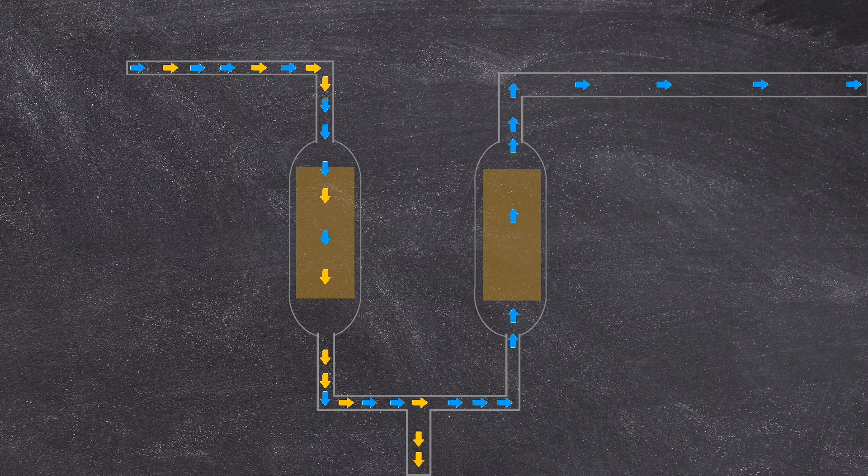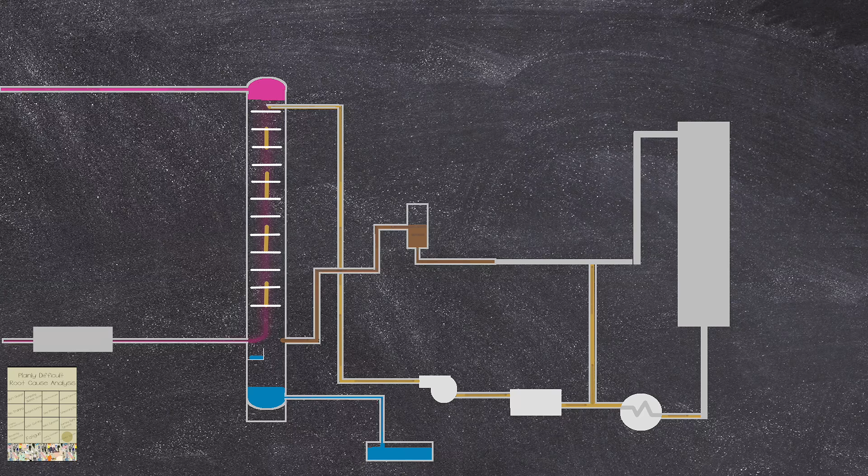From the plant, crude oil and raw LPG is sent to Long Island Point for further processing to commercial LPG and stabilised oil for refinement. The natural gas once processed at Longford, however, is then dispensed to the Victorian Natural Gas Network. The natural gas works are done by 3 gas plants, named rather creatively GP1, 2 and 3. Now, the process roughly goes as follows.

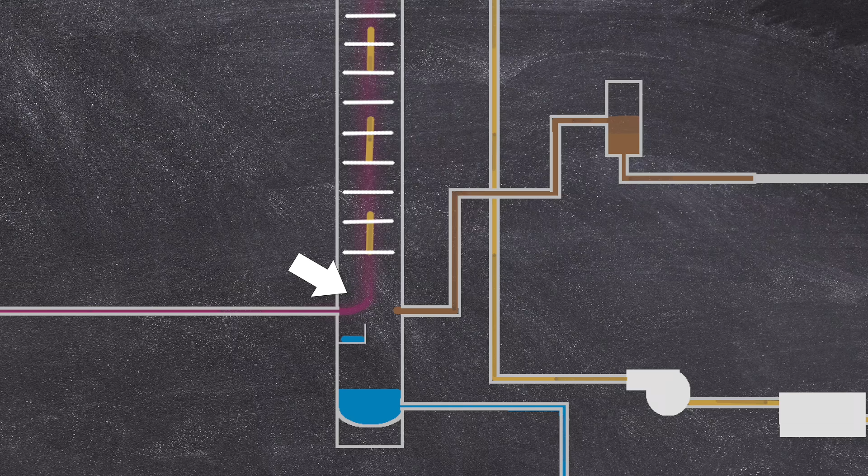Gas comes in from the offshore fields via pipelines. It is cooled and loses its pressure during its journey along the lines to the onshore. The materials pumped from the fields contain methane, ethane, propane and butane, as well as water. During this time, water and the hydrocarbons become condensed and settle in the low parts of the pipework. These are known as slugs and can prove to be a little bit troublesome, as they can weigh several tons.

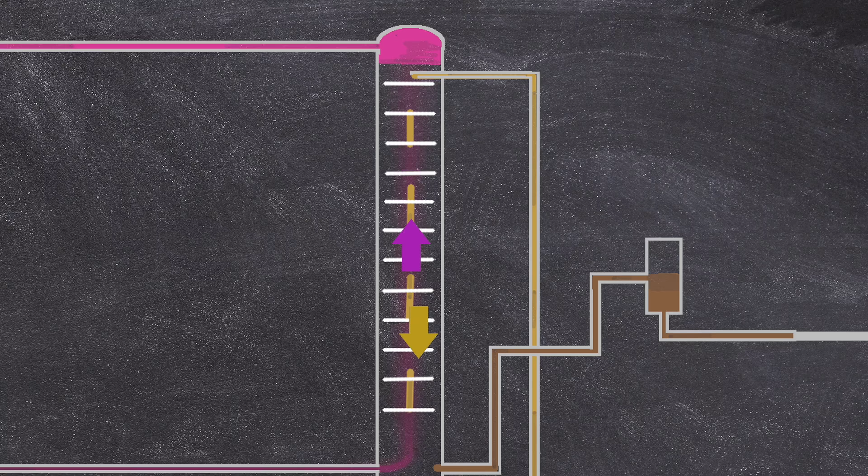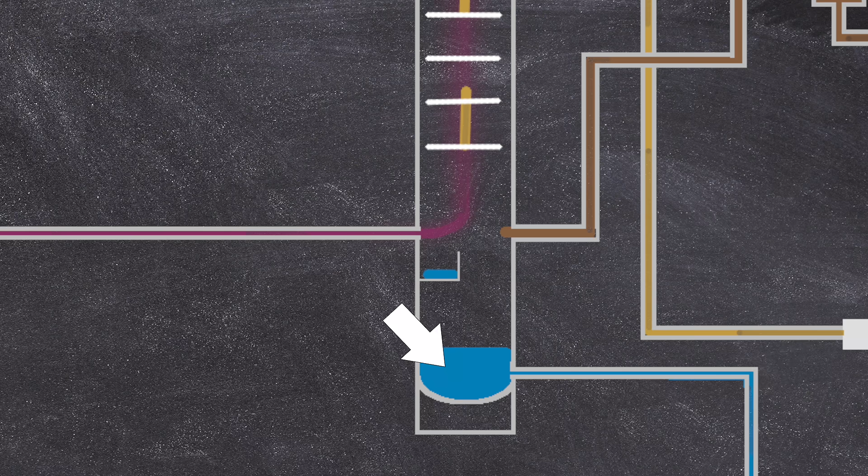When they reach the plant, the energy they carry is dissipated via things called slug catchers. These separate off liquid from the gases for further processing. This is done at the 3 gas plants. It passes through an inlet separator in each plant, which removes any free water and any other condensate. The gas then passes through molecular sieves in each plant to remove water vapour and hydrogen sulfide.

Now, for the rest of this video, I will be focusing on just one of the gas plants, which is the first one built in 1969, named number 1. Anyways, the gas inlet is chilled by 2 heat exchangers to prepare it for the absorption process, which is better performed at colder temperatures. Gas plant 1 has 2 absorbers which operated in parallel. The gas was fed into the lower part of the absorbers at a temperature of -25 degrees Celsius.

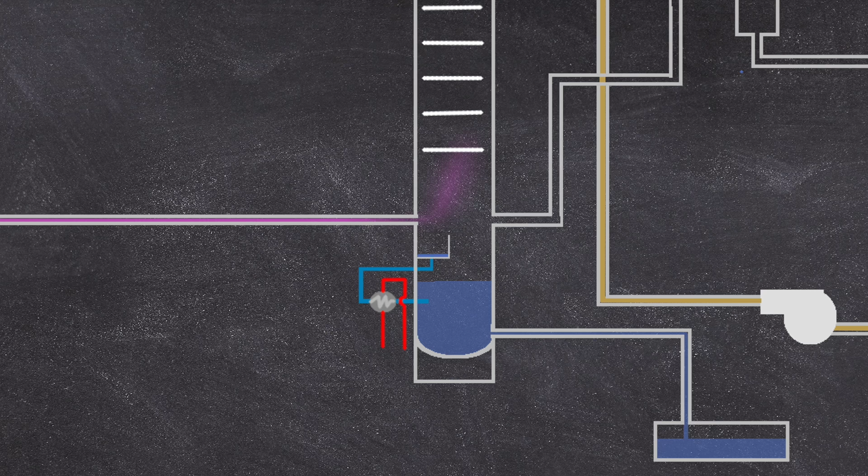Each tower had internal trays all the way up it. This allows gas to rise and for oil to be fed at the top to drip down via the help of gravity from each tray downwards. As the oil dropped from tray to tray, it absorbed a lot of the heavier components shed from the gas, for example, the ethane, propane and butane that it contained. The lean oil was thus made rich, as it was saturated with the hydrocarbons.

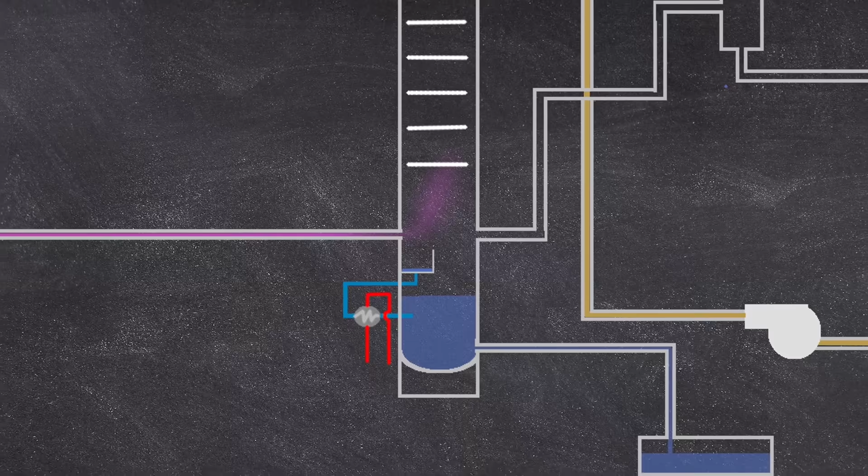Condensate carried in the cooled gas dropped into a lower tray in the absorber, and this was taken off for further processing. In order to help remove it, it was warmed up using a heat exchanger and goes via its own flash tank.

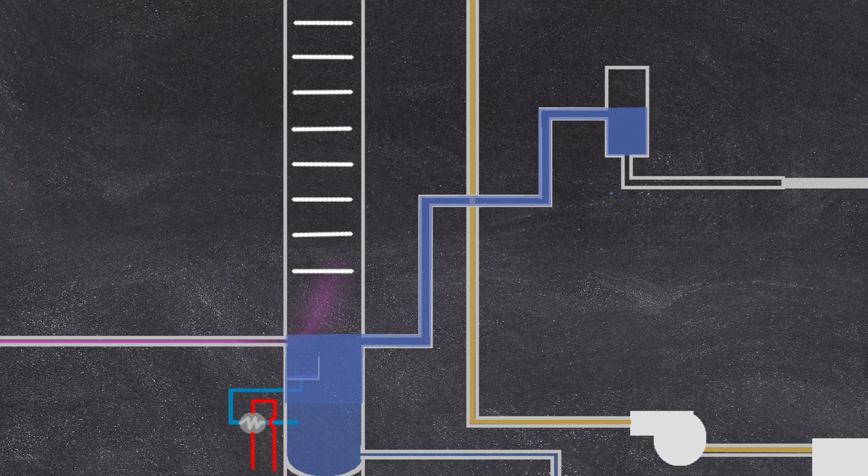The gas taken out of the top of the absorber is then taken off for sale as natural gas for consumers. Operators for Gas Plant 1 were informed of the system's status via equipment in the control room. Due to its age, dating back to 1969, the instrumentation was a mixture of pneumatic equipment installed at the plant's vintage and a much newer computerized system.

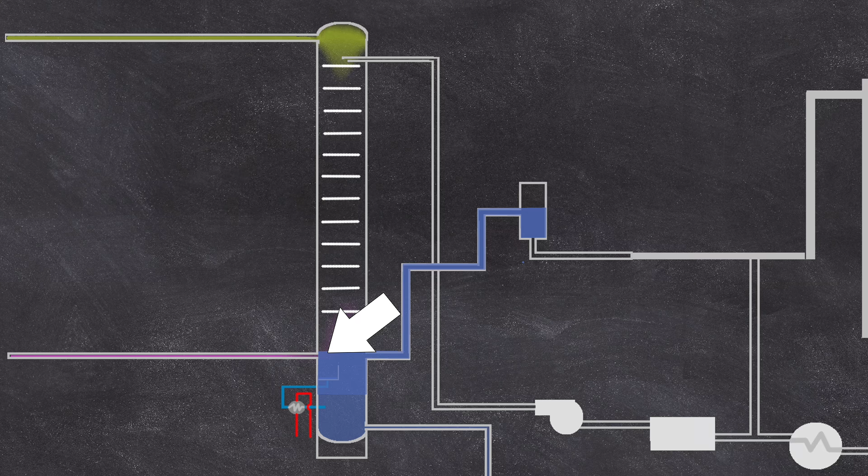Now the site ran 24 hours a day and was staffed as such, with two 12-hour shifts formed by five shift teams. Right, so now we've got some kind of idea of how the plant worked and a rough overview of its operations, let's move on to the main course of our video, the disaster.

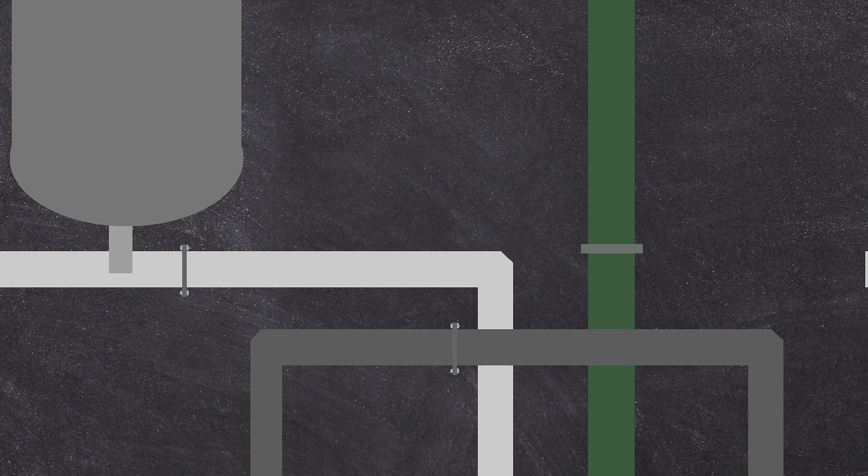The disaster. It is the morning of the 25th of September 1998, and Gas Plant 1 was dealing with a large buildup of condensate in absorber B. The condensate could only go to two places: the condensate flash tank, or overflow into the rich oil line to its own flash tank, the latter of which being less than ideal. Eventually, the condensate level rose to such a point that it was unmeasurable by the plant instrumentation. This was a sure sign that it had risen into the rich oil section of the absorber.

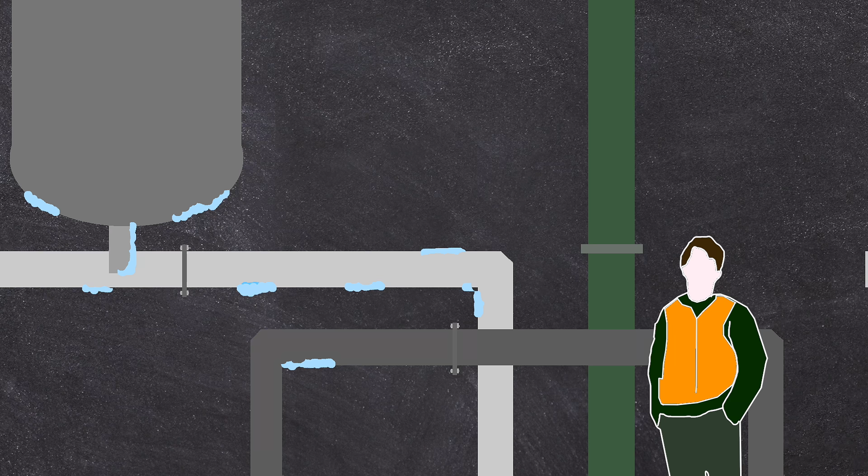The decrease in temperature and rise in condensate level caused the valve to close, regulating the flow of two vital pumps, which played a part in circulating the lean, warm oil to the absorber. This caused them to shut down, thus cutting off the flow of warm oil to the absorber, but gas was still being inserted into the system, which was still bringing in more condensate. The increase in cool condensate and lack of warm oil caused the system temperature to drop.

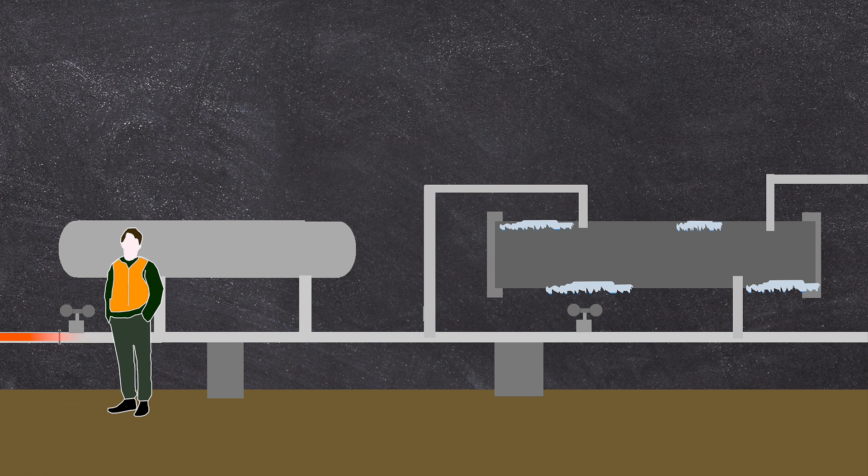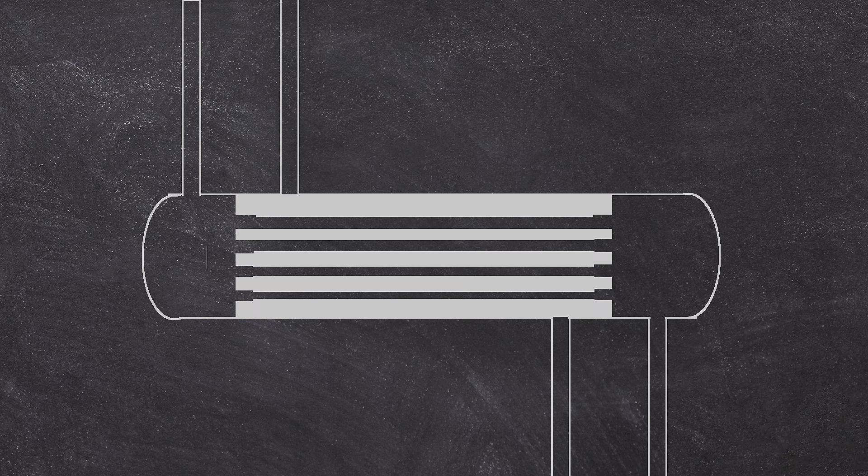The shift operators tried to restart the pumps, but to no avail. However, they could have been overridden if placed into test mode, but no one had been taught this. Parts of the system temperature dropped to minus 48 degrees Celsius, with the absorber reducing to minus 25 degrees. Heat exchanger GP905 was starting to show visible signs of icing on the outside along its pipework. This was around 8:38 in the morning.

All the time the gas was still being added to the system, a decision to shut Gas Plant 1 down was made. Arrangements had to be made to divert the gas from Plant 1 to Plant 2. The transfer was completed at roughly 11:30 in the morning. The decision to start up the gas plant was made at around 12 p.m. Heat exchanger reboiler for the lean gas, GP905, was observed to have formed quite a large amount of ice over its outer shell and uninsulated sections.

Operators decided to reduce the flow of lean oil throughput in order to not cause a rapid change in temperature, as this could cause a fail and rupture in the heat exchanger. An operator was sent down to operate a valve to reduce the flow. However, some confusion in communication resulted in the wrong piece of equipment being operated, thus the flow to GP905 was still full. When the operations restarted and the pumps whirled back into use, an estimated flow temperature of 230 degrees Celsius was sent to the heat exchanger.

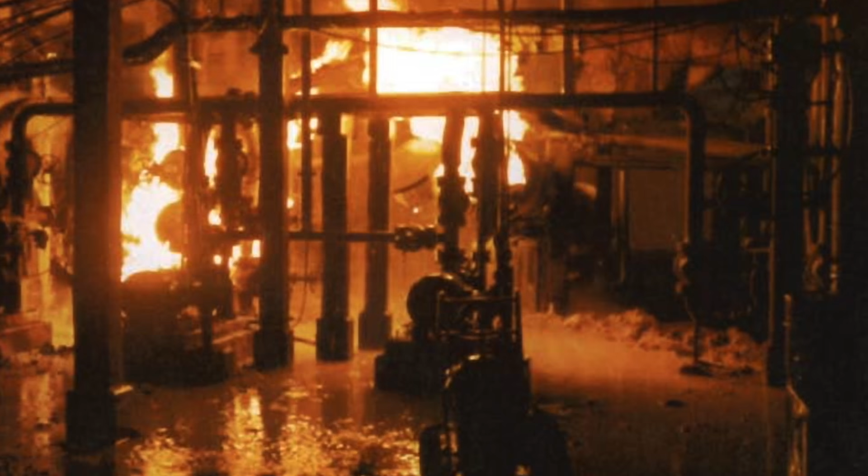At roughly 12:26 p.m., the brittle steel of the exchanger's outer shell failed due to the quick change in temperature. The rupture released over 10 tons of hydrocarbon vapour into the atmosphere. These were highly flammable. The cloud travelled for roughly 170 metres for around 60 to 90 seconds, until it found some fired heaters, and then caught alight.

The deflagration burnt back to the leak source, and a jet of fire shot out underneath the pipe rack junction, causing 9 more leaks. The plant supervisor and maintenance supervisor were killed during this initial part of the fire. The flames would continue to burn for 2.5 days, creating more and more leaks and more fires.

This was because of how long it took to completely isolate Gas Plant 1 from all the flammable material. Gas services would be halted for consumers for 2 weeks, causing significant issues for local industries and residential properties, which brought an economic loss estimated at around 1.3 billion Australian dollars. The site processed roughly 37.7 thousand barrels per day of LPG and over 188,000 barrels of crude oil per day. Thus, this caused a very large financial shock to local industry when it was shut down.

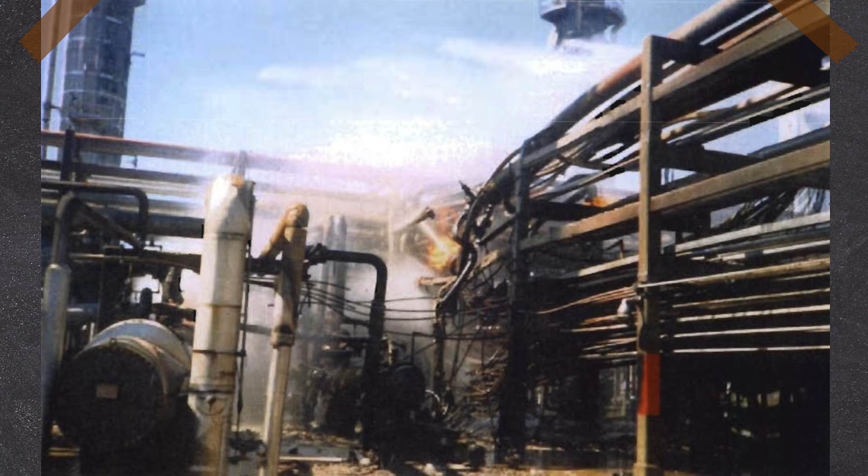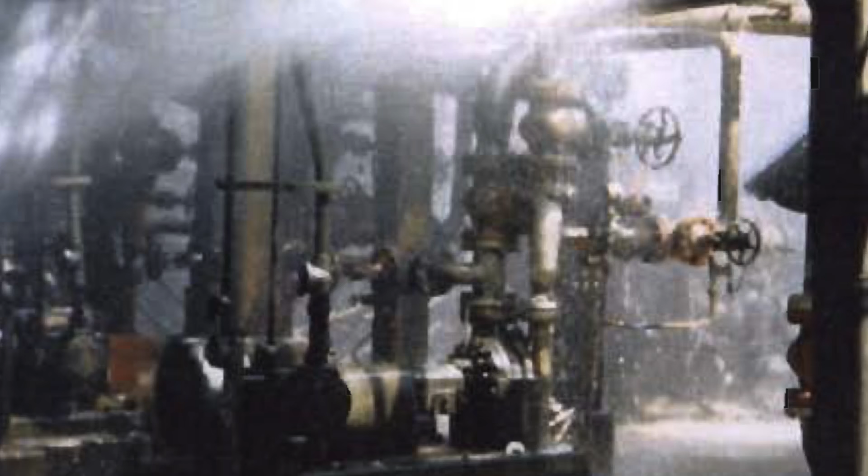So needless to say, the disaster would result in an investigation, and being in Australia, it would be dug into via a royal commission. In our case, it was headed by former High Court Judge Daryl Dawson and was launched in October 1998. The investigation.

So almost straight away after the fire, investigators from Esso descended upon their severely damaged site, and they began poring over the remains and interviewing their staff. Initially, Esso went down the usual big corporation route, trying to push the blame onto the site's operators, as noted in Andrew Hopkins' paper, Lessons from Esso's Gas Plant Explosion at Longford. The company argued that operators and their supervisors on duty at the time should have known that the attempt to reintroduce warm liquid could result in brittle fracture. But this wasn't exactly true.

The inquiry took a different view, again quoting Hopkins here. The Commission took the view that the fact that none of those on duty at the time understood just how dangerous the situation was indicated a systemic training failure. I'm more inclined to agree with the inquiry here, as Esso was known at the time to prioritise downtime incidents in its training. This can lead to focusing on getting things up and running quickly, but not always in the safest way. The inquiry would settle on 4 main issues.

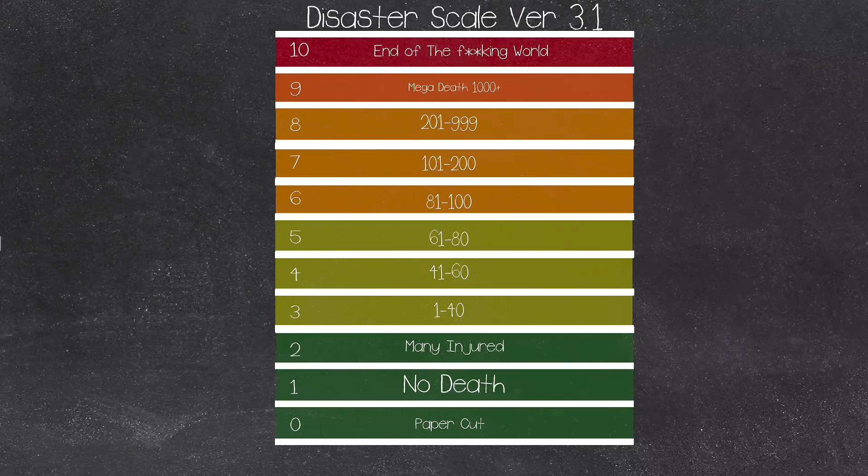The site was needlessly complex, meaning isolations were difficult to undertake. Poor training of personnel and operating procedures led the operators to become confused and operate the incorrect equipment. Poor communication between shifts, especially on the night and day shift handover on the disaster day. And finally, the way the control systems worked, in that they gave excess alarms, desensitizing staff to serious issues.

So a forensic investigation would also be undertaken on the failed part of the reboiler, and it was found that the failure had occurred at a weld seam. As the warmer oil was pumped in, the outer section still remained cold, and it was this joint where the failure had occurred. The difference in temperature caused a stress fracture in the casing of the reboiler. The reboiler was normally operated at a temperature range of between 60 and 230 degrees Celsius, which was a sudden shock from the minus 48 degrees it had been subjected to during the shutdown.

In the aftermath, Esso received a fine of 2 million Australian dollars in July 2001, followed by a class action suit from consumers for loss of earnings due to the gas outage. This would be settled out of court, and finally, on top of all that, the company had to pay 32 million Australian dollars in property damage, in addition to the sum of 400 to 500 million in damages to their own plant.

The disaster was unfortunately all too common. Operators doing the wrong thing in a rush, but trying to save pennies for the company only ever results in a much bigger cost. So that's my video on the 1998 Esso Longford disaster. It's going to be a 3 on the scale, and this I've got for my root cause analysis card.